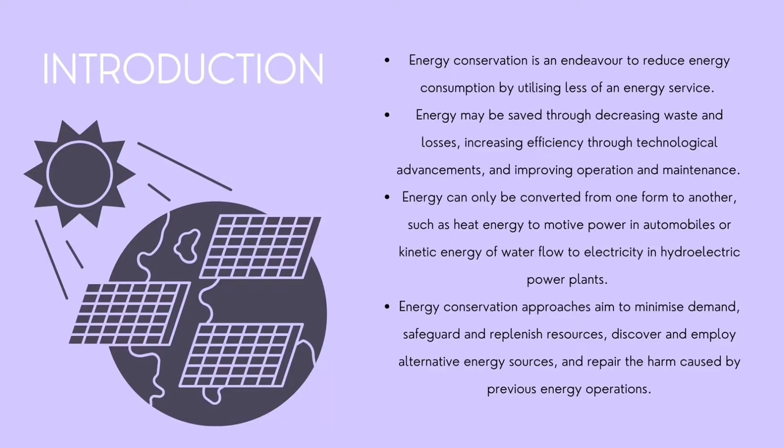Next is the benefits of energy conservation. Energy conservation is critical to mitigating climate change. It aids in the substitution of renewable energy for non-renewable resources. Energy conservation is frequently the most cost-effective solution to energy shortage, as well as a more ecologically friendly alternative to greater energy production. The benefits of energy conservation include: reduced living expenses, less power plants, reduced dependence, and finite resources.

For reduced living expenses, saving energy typically results in lower living expenditures. When the general population consumes less gasoline or electricity, prices fall. Furthermore, most equipment lasts longer when it is used less frequently. This saves money on repairs for the car, computer, air conditioner, and kitchen appliances.

Next is less power plants. If the public saves electricity, utilities will not need to build as many power plants. These facilities are frequently unattractive, make a lot of noise, and pose a safety risk to the people who live nearby.

Reduced dependence: less consumption means lesser reliance on sophisticated technologies, transportation infrastructure, and trade agreements. When individuals preserve fuel, natural disasters, accidents, and military confrontations are less likely to occur. Conservation makes it more valuable to rely on local and regional energy suppliers.

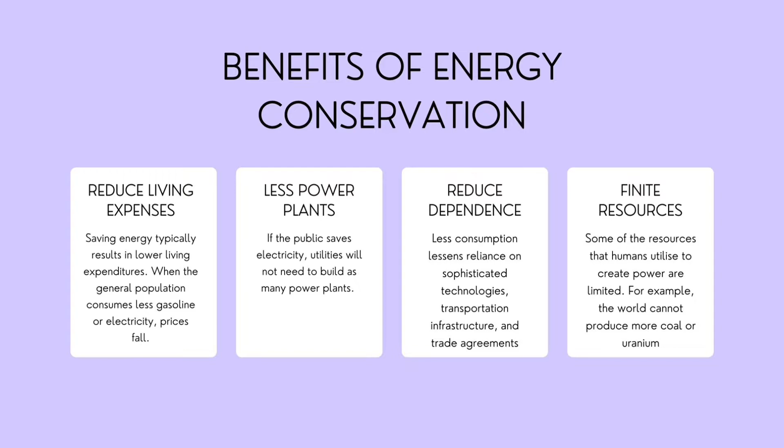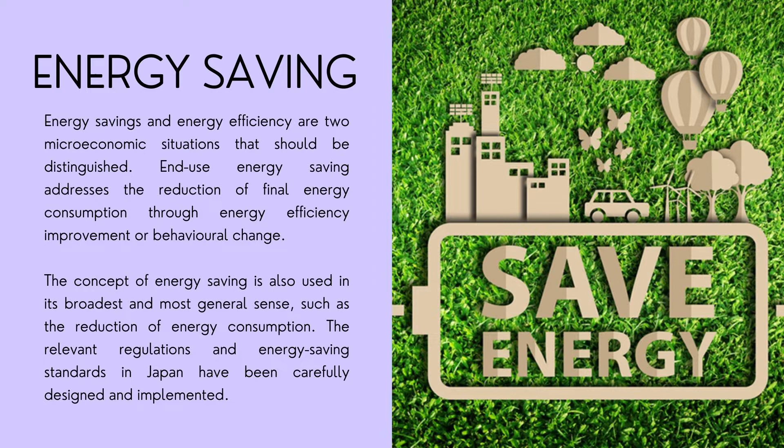Next, I will contribute on energy saving. Energy saving and energy efficiency are two microeconomic situations that should be distinguished. Energy saving addresses the reduction of final energy consumption through energy efficiency improvement or behavior change. The concept of energy saving is also used in the broadest and more general sense, such as the reduction of energy consumption. The relevant regulation and energy saving standards in Japan have been carefully designed and implemented.

For the next slide is about energy efficiency. First off, what is energy efficiency? The use of less energy to do the same work or generate the same outcome is referred to as energy efficiency. Energy efficient houses and buildings use less energy to heat, cool and run appliances and gadgets, while energy efficient manufacturing facilities generate items with less energy.

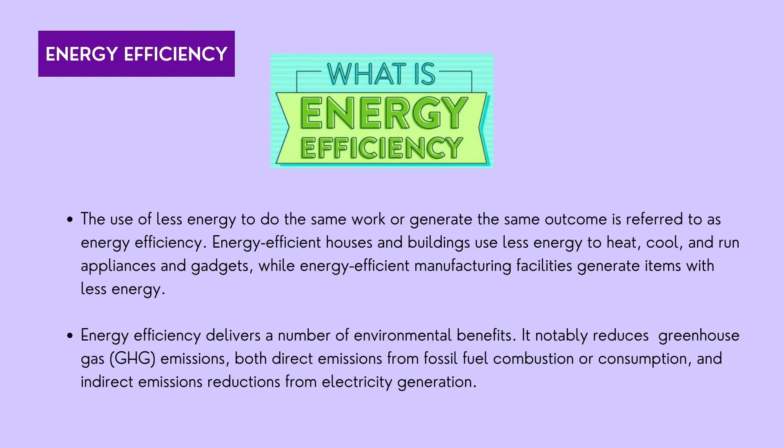Energy efficiency is one of the simplest and most cost-effective strategies to address climate change, cut energy prices for consumers, and boost the competitiveness of businesses. Energy efficiency is also a critical component in reaching net zero carbon dioxide emissions through decarbonization. Energy efficiency methods for buildings are ways for reducing a building's energy usage while preserving or enhancing its level of comfort. Alright, here is data collection from the case study.

For case study 1, the building is located at Masjid Tanah, Melaka, and this house is nearly 40 years old as it was built around the 80s. This house is owned by Norzila binti Rashid, and the type of building is a single-story terrace house.

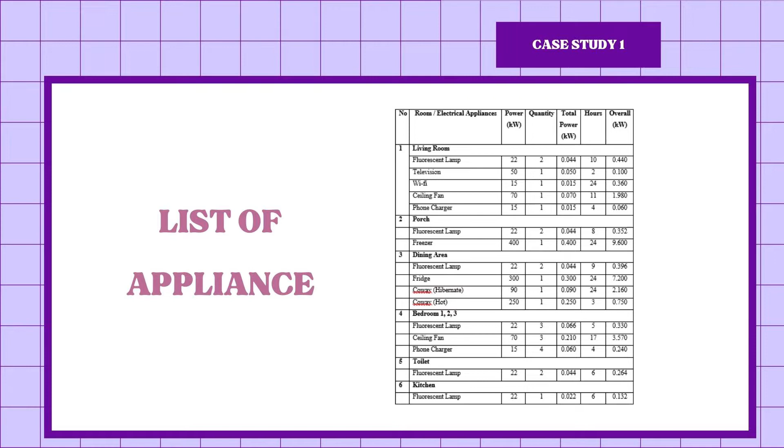The list of appliances in this building is like a basic residential building. We have a television, fluorescent lamp, ceiling fan, phone charger, and the table shows the total power consumption for each item in this building.

This is the building performance for case study 1. From the table, we can see that the highest energy usage in this house is the chest freezer with 9.6 kilowatt hour at the porch of the case study area.

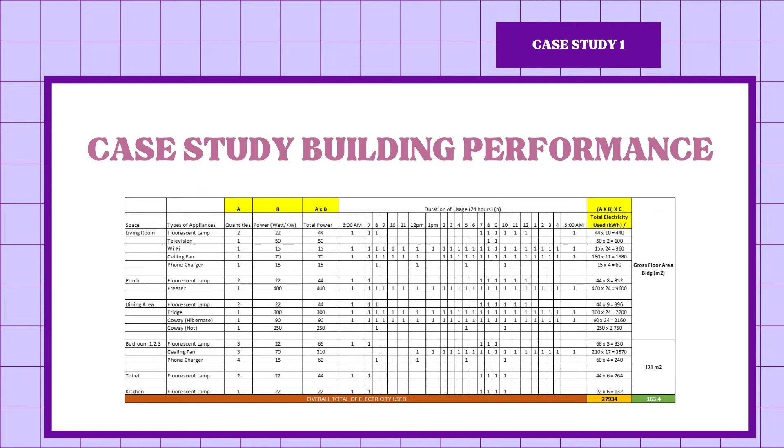The usage of fridge and ceiling fan also contribute to the second and third highest total of electricity use, which is 7.2 kilowatt per hour and 3.57 kilowatt per hour respectively. Apart from that, the usage of television at the living room has lower total electricity use, which is 0.1 kilowatt per hour.

The total usage of energy from January to June for case study 1. According to the chart, energy consumption in February is the lowest per month from the rest of the recorded months, which is 191 kilowatt hour only. This is because during February, the occupants and the owner had a trip for 2 weeks, resulting in small energy consumption.

The highest energy consumption is in June with 409 kilowatt per hour, quite high from the previous month, because one of the occupants, who is studying for a degree, started a new semester and needed to use electronic devices for online classes, research and assignments, working for a long time in a day.

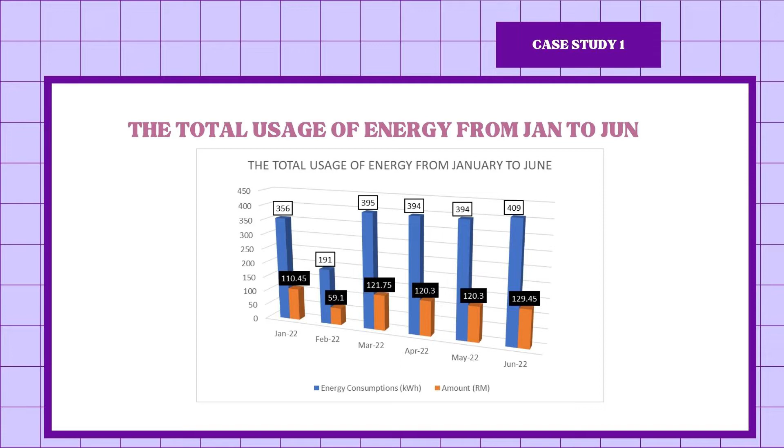Next is case study 2, located at Seremban, Negeri Sembilan. The type of building is a one-story semi-detached house, or semi-D, built around 2009. This property was occupied around 2011.

Building performance for case study 2. The total area of this property is around 1,248 square feet. The daily average usage of electricity in this house is around 59 kilowatt per hour. The most energy used daily is at the wet kitchen, with 24 kilowatt per hour, which involves the use of a refrigerator that runs all day long.

The use of energy in both living areas is at average rate, with the difference due to the occupant not really using the second living area. The daily energy consumption in each bedroom is not really high, meaning they are rarely used, because this is a family residential home, and the occupants are working and going to school every day.

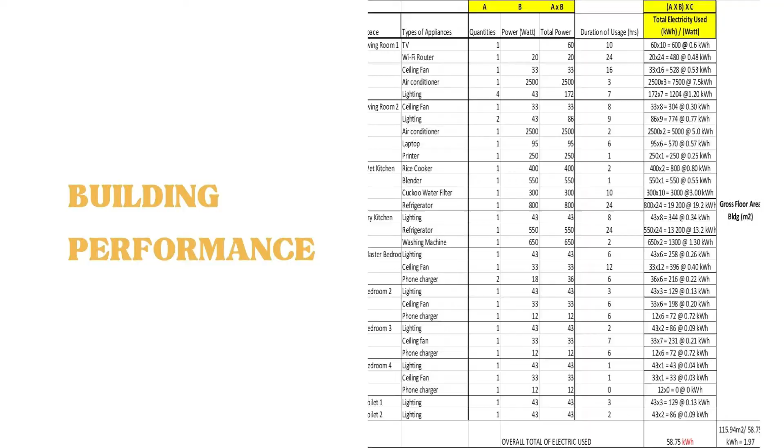Next is case study 3, located at Johor Bahru, Johor. The type of building is a single-story terrace intermediate house, built around 2002. This building was occupied in 2019.

This is the building performance for case study 3. The total area of this property is around 1,400 square feet. The daily average usage of electricity of this house is around 76 kilowatt per hour. The most energy used in this house is in the kitchen and bedroom 2, because the kitchen has 2 refrigerators that run 24 hours a day, and the occupant in bedroom 2 fully utilizes all the electrical appliances in the room.

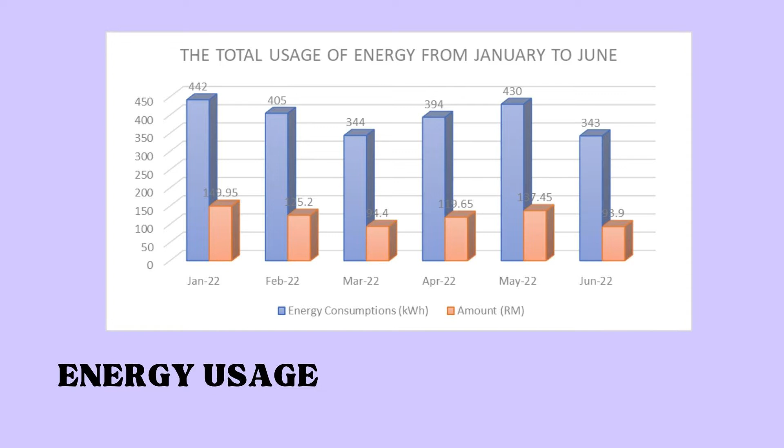While the lowest energy use is in June, only 343 kilowatt, which happened because one of the occupants was away from home and the rest were busy with their daily activities.

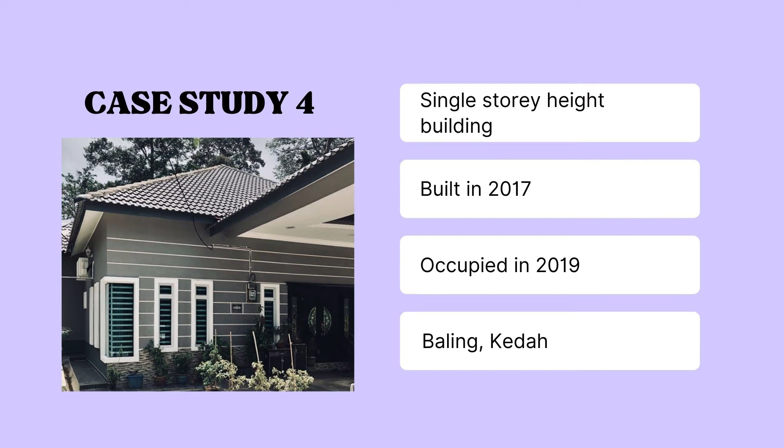Next case study is case study 4, located at Baling, Kedah, and the type of residential building is a single-story high building, built around 2017 and occupied around 2019.

List of appliances: according to the data in the table, the water bore system has the greatest energy consumption of the building with 24 kilowatt, because the building has a water bore system that needs electricity 24 hours a day.

However, the building's lowest energy usage is 0.02 kilowatts, which is the night lamp, whose power is just 3 watts and it's only utilized at night.

Next is energy consumption from January to June. According to the data in the chart, the month of May has the highest rate of power consumption, approximately around 700 kilowatt per hour. May has the highest rate since it is the month of Shawwal, when power consumption is likely to be high owing to family gatherings such as open houses.

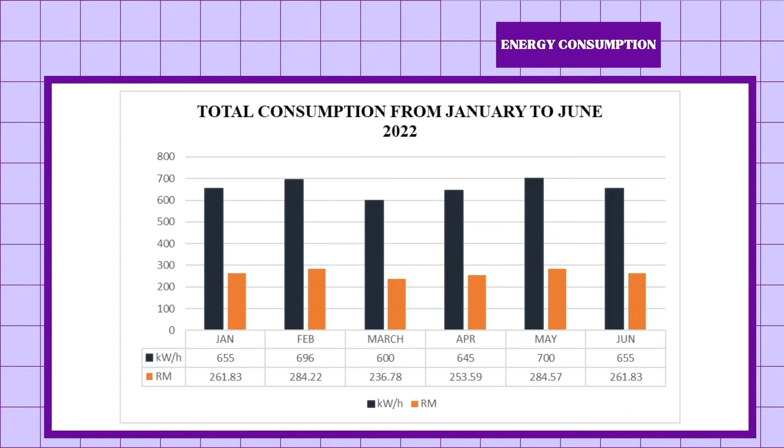Other than that, March has the lowest rate of the 6 months listed with around 600 kilowatt per hour. The reason for this is because according to weather forecast, Kedah has a considerable measure of monsoon, rains and windy weather during the month of March. Therefore, the usage of air conditioning or mechanical ventilation is not necessary as often. In addition, the energy consumption of some mechanical ventilation equipment was lessened.

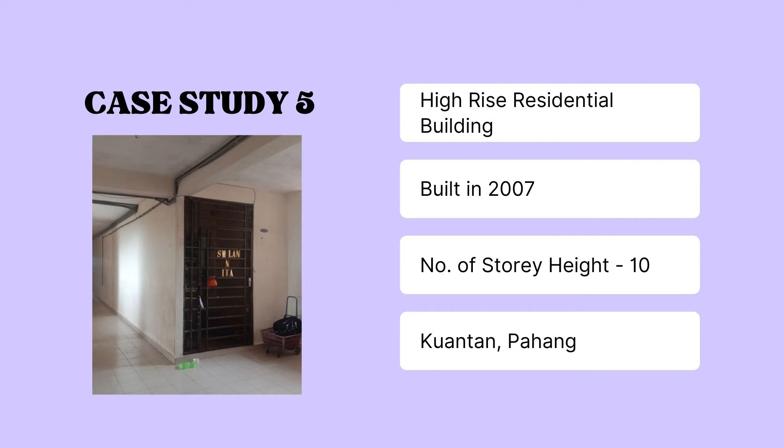Fifth case study is a residential building, which is a high-rise building with the number of story height is 10 stories. It was built in 2007 and occupied in 2009. It is located in Kuantan, Pahang.

For the next one is about the electrical appliances, where the list of electrical appliances are such as the ceiling fan, fluorescent lamp, TV, Wi-Fi, water purifier, chiller or freezer, blender, washing machine, rice cooker, laptop charger, phone charger and also the water heater.

And for the total consumption from January to June of 2022, the chart shows the amount of electricity bills as well as the energy consumption that has been generated by Tenaga Nasional Berhad TNB, and the sample of bill takes account in 6 months.

The highest energy use is in May 2022, which is 410 kilowatt per hour for 128 ringgit Malaysia, while the lowest amount is in June 2022, which is 345 kilowatt per hour for 93 ringgit and 30 cents.

This happened due to the Raya celebration in May, where family, relatives, friends and neighbors gather around in the house to celebrate the Hari Raya together.

While in June, the bills have reduced a little because the number of occupants in the house has decreased to do their work, and some of them have entered their universities. So the energy use in the house becomes lower than the rest of the months.

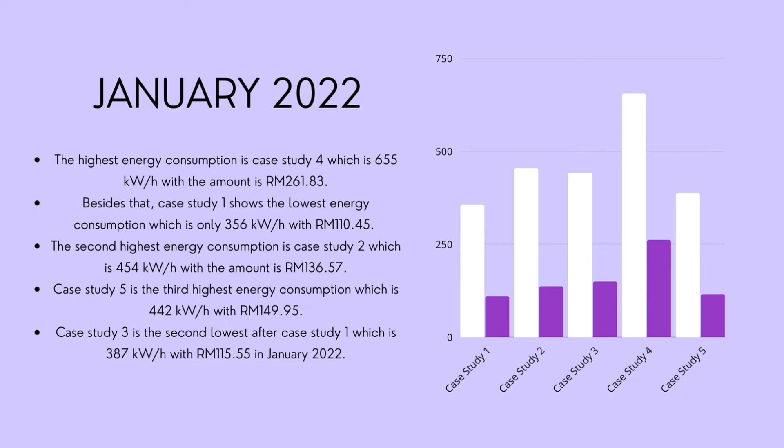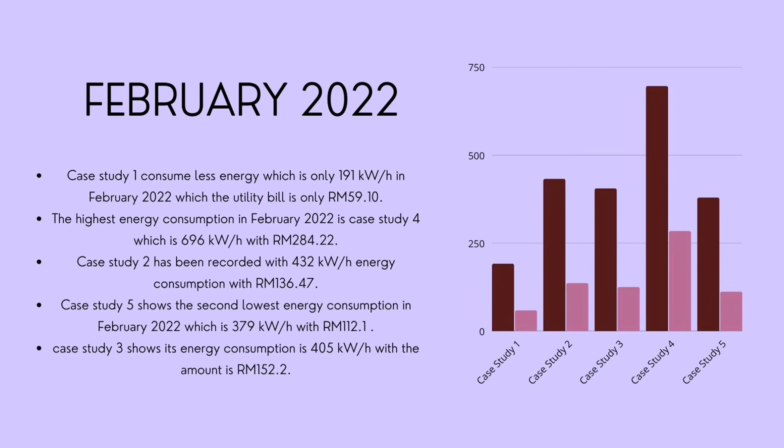Other than that, case study 5 shows the second lowest energy consumption in February 2022, which is 379 kilowatt per hour with RM112.1, following by case study 3, which shows its energy consumption is 405 kilowatt per hour with the amount RM152.2. This shows the third lowest energy consumption among the 5 case study buildings.

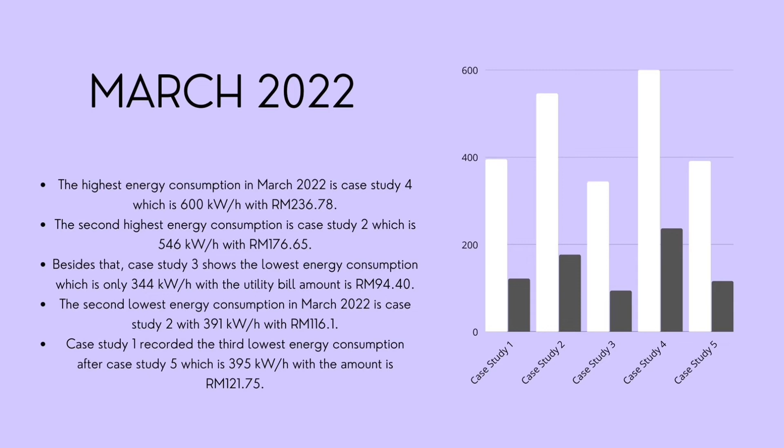According to the bar chart, it shows the overall energy consumption of 5 case studies involved in March 2022. As can be seen in the chart, it shows that the highest energy consumption in March 2022 is case study 4, which is 600 kilowatt per hour with RM236.78 cents.

Other than that, the second highest energy consumption is case study 2, which is 546 kilowatt per hour with RM176.65 cents in March 2022.

Besides that, case study 3 shows the lowest energy consumption in March 2022, which is only 344 kilowatt per hour with the utility bill amount of RM94.40 ringgit.

Case study 3 requires less energy as the building consists of only 3 people, which means the building requires less energy per month. The second lowest energy consumption in March 2022 is case study 2, with 391 kilowatt per hour at RM 116.1 cents. Lastly, case study 1 recorded the third lowest energy consumption after case study 5, which is 395 kilowatt per hour with the amount RM 121 ringgit 75 cents.

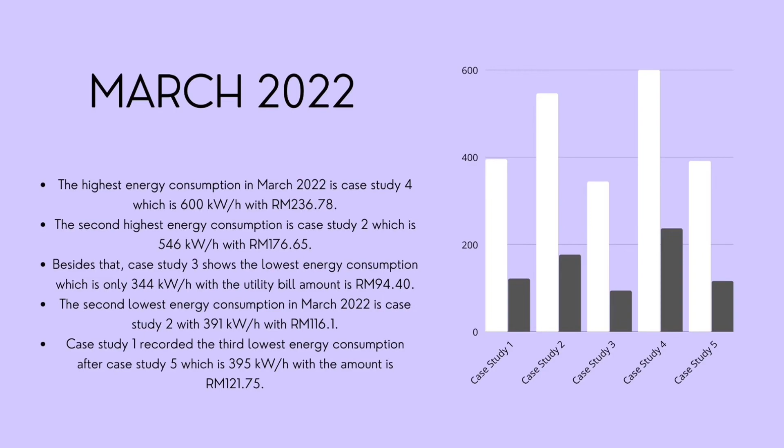Next, the bar chart shows the overall energy consumption of case study 1 until case study 5 in April 2022. Based on the bar chart, the highest energy consumption is case study 4, which is 645 kilowatt per hour with the amount 253 ringgit 59 cents. Case study 4 consumes high energy because the building uses so many electrical appliances which require 24 hours consumption per day. For example, case study 4 building has a water bore system which requires more energy consumption.

Besides that, case study 5 shows the lowest energy consumption, which is only 362 kilowatt per hour with 101 ringgit 75 cents in April 2022, while case study 1 is the second lowest after case study 5, which is 390 kilowatt per hour with 115 ringgit 55 cents in April 2022.

The second highest energy consumption is case study 2, which is 589 kilowatt per hour with the amount 214 ringgit 34 cents, compared to case study 3, which consumed energy of 387 kilowatt per hour in April 2022. Apart from that, case study 3 is the third highest energy consumption in April 2022.

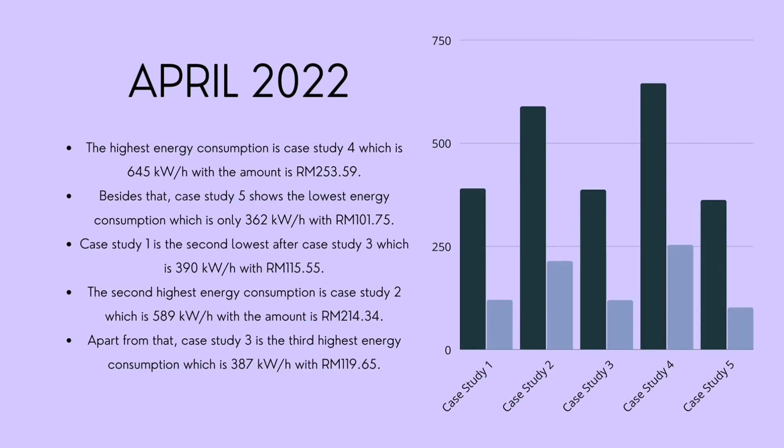So for May 2022, the bar chart shows the overall energy consumption of case study 1 until case study 5. Based on the bar chart, the highest energy consumption is case study 2, which is 741 kilowatt per hour with the amount 281 ringgit 75 cents. Case study 2 consumes high energy because May is the month of Eid, when power consumption is likely to be high owing to family gatherings such as open house.

Besides that, case study 1 shows the lowest energy consumption, which is only 320 kilowatt per hour with 84 ringgit in May 2022, while case study 5 is the second lowest after case study 1, which is 410 kilowatt per hour with 128 ringgit in May 2022. The second highest energy consumption is case study 4, which is 700 kilowatt per hour with the amount 284 ringgit 57 cents, compared to case study 3, which consumed energy of 430 kilowatt per hour.

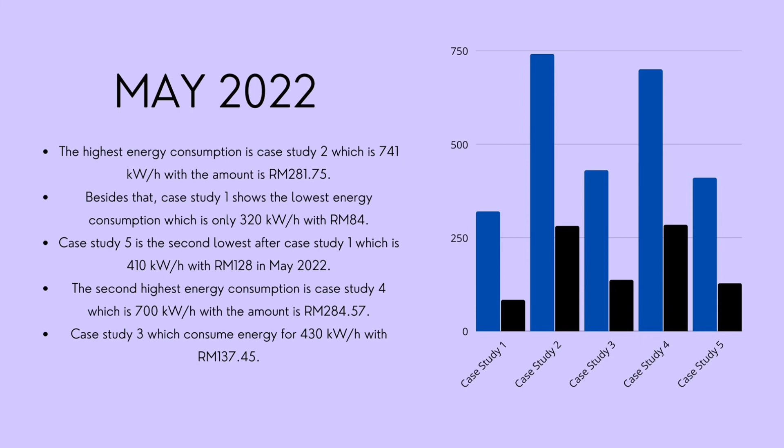Lastly, for the total energy consumption in June 2022, the bar chart shows the overall energy consumption of case study 1 until case study 5. Based on the bar chart, the highest energy consumption is case study 4, which is 655 kilowatts with the amount 261.83 cents. Case study 4 consumes high energy because the building uses more mechanical ventilation such as air conditioning in June 2022 due to the bad weather condition.

Besides that, case study 3 shows the lowest energy consumption, which is only 343 kilowatts with 93 ringgit and 90 cents in June 2022, while case study 5 is the second lowest after case study 3, which is only 343 kilowatts with RM 93 ringgit and 30 cents in June 2022.

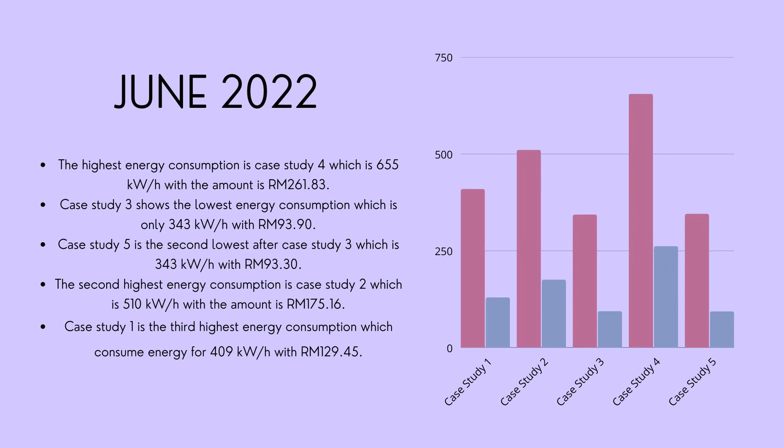The second highest energy consumption is case study 2, which is only 510 kilowatts with the amount RM 175 ringgit and 16 cents, compared to case study 1, which consumed energy of 409 kilowatts in June 2022. Apart from that, case study 1 is the third highest energy consumption in June 2022.

And last but not least is the conclusion. According to the findings and results of the case study, each case study's energy consumption had a different result based on their data. This means the individual has a range of aspects that influence the amount of energy consumed on a regular basis. Furthermore, it can be swayed by the perimeter of the house area, which has different types of housing material. Furthermore, the area of the building influences the energy consumption in the house.

Following that, the monthly increase in paid amount for each house has different data recorded. This means that the type of application used can result in an increase in the amount of power used for each application in the house. Furthermore, with modern technology introducing smart ways to save energy, there is a trend of popularity in energy consumption that's suitable for saving energy for applications, especially home furniture.

It can also be compared to using traditional technology, which can increase power usage more than modern technology applications. However, most people were unaware of this information, particularly those who did not care about conserving energy. Energy consumption is influenced by a variety of factors, including the number of occupants in the house who use the application. If there are more than 2 occupants, the energy consumption in the house may increase. Finally, ensure that the occupants or owners of the house pay in full to reduce the electricity bill, paying monthly to lessen the bill.